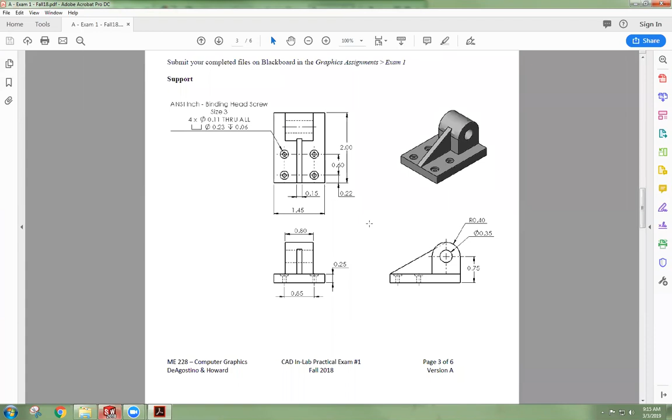Okay, so we've come to the second problem. And here I'm only going to show you how to CAD this piece. I'm presuming that you can CAD this piece on your own. And I've got other videos that show you how to do assemblies. So let's work through this piece real fast.

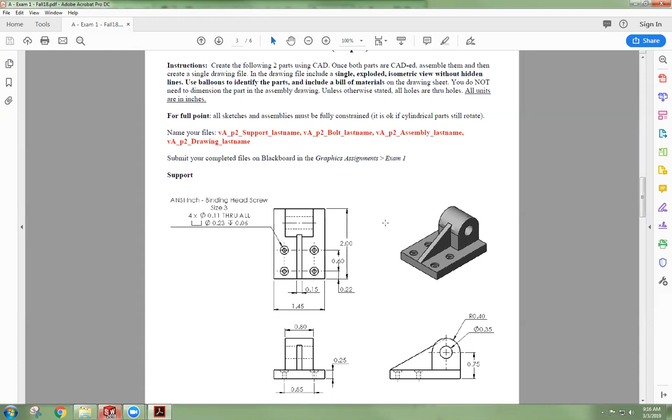When I look through the instructions, I can see that it's telling me what it specifically wants on the drawing file. It wants those balloons, bill of material. You don't need to dimension the parts. All units are in inches. Okay. But I don't have anything weird, no parametric equations they need to do. So I'm kind of free to tackle this part how I see fit.

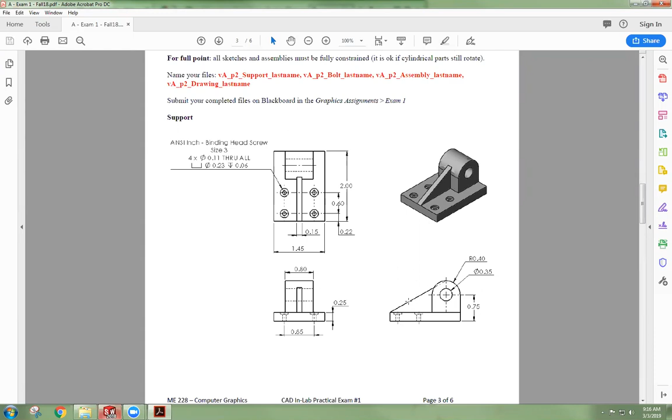And what I'm thinking, you could come at this a couple different ways. I'm thinking that I'll do it from this right view and then create multiple extrusions. I'll show you when we get there. In this piece, the instructions don't say that you have to use the rib tool. So there is a way you could do it without the rib tool. The rib tool's awfully handy. So that's how I'm going to show you how to do it.

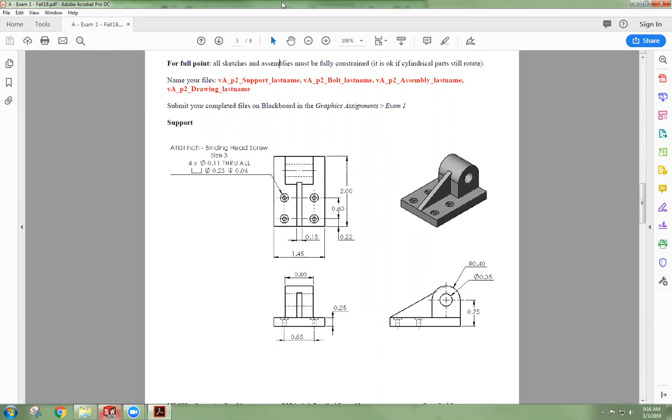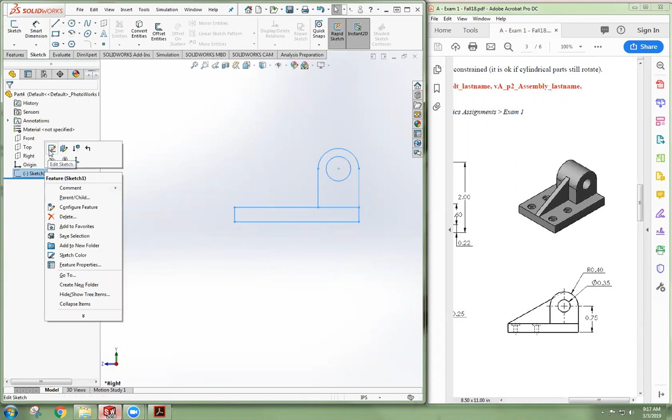Okay, so new part and starting with the right face. Use my rectangle tool. And then going back to my arc. And I just want it to be tangent to both these lines. I can see from my center mark here that this is just a half circle. And then I've got another concentric circle right there. All right, so I've got my basic shape. I'm ready to start dimensioning. I put it in the right units. That's a good start.

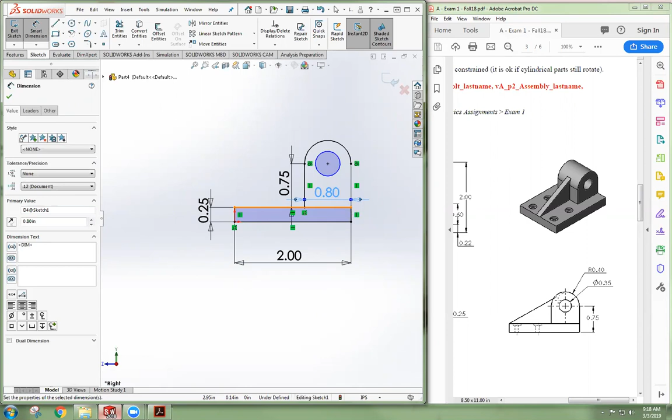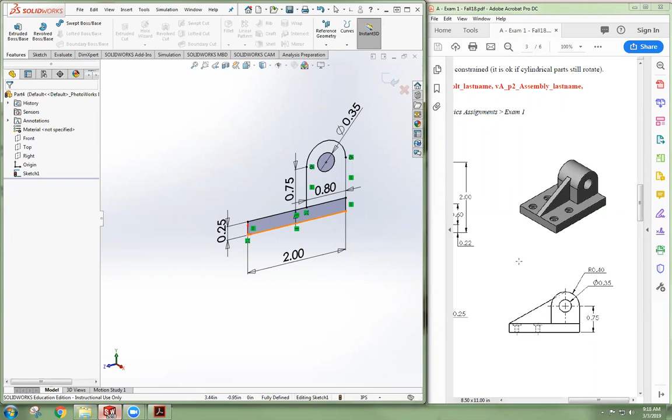Okay. And I know it's 0.8 wide because this radius is 0.4. So double it, it's going to be 0.8 wide. Great, so I've got everything fully defined. So now I'm ready to extrude it. And it's going to take two, since I've got two shapes that are of different widths. Okay. So let's start here. I'm just going to start with the base. And it goes 1.45 units wide. Inches in this case.

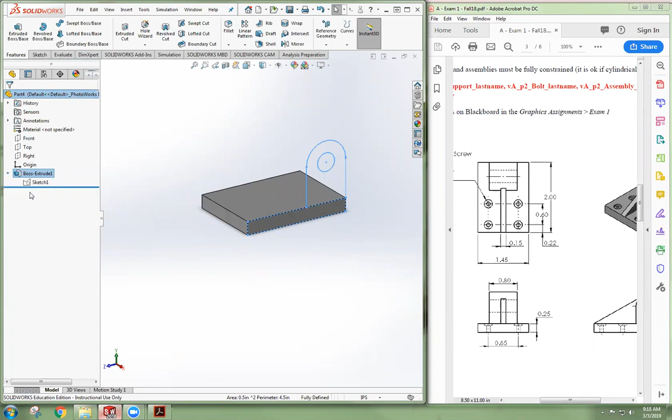Okay, so clicking on the sketch, highlighted blue, extrude boss base. I'm going to select my contours, which is this. Okay, so I could do this two ways. I'm going to use an offset. So I could offset my extrusion so that it's going in the right place. And we can do that. Hold on.

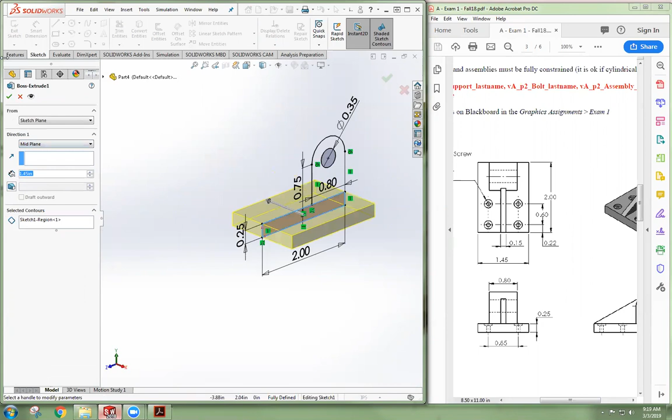Even easier, I probably could have just done this with a mid-plane extrusion. So let's go ahead. Let's do that. So I'm going to delete this. Yes, I'm going to go in and edit this so it's mid-plane. Now I can select my contour here. Mid-plane, 0.8. That's a little bit faster.

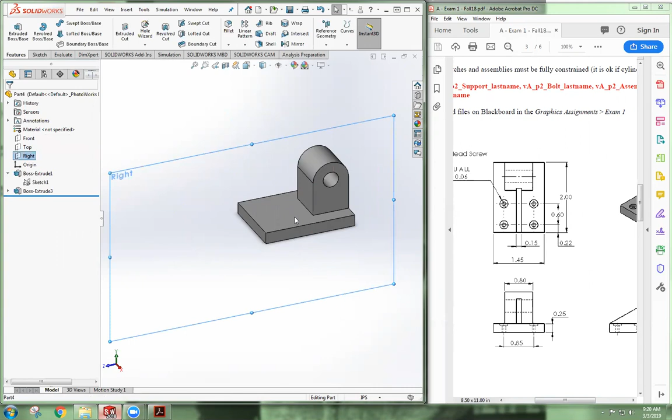Next, let's tackle the rib before we get into the hole wizard. So looking at that right, I'm going to sketch on this right plane. So sketch. I'm going to go normal to it. I'm going to start actually with my center line. So I know I've got this construction line here. You don't have to draw the construction line, but I need something to get that relation. And if I bring the line all the way up, I'm going to create this closed geometry that I don't want.

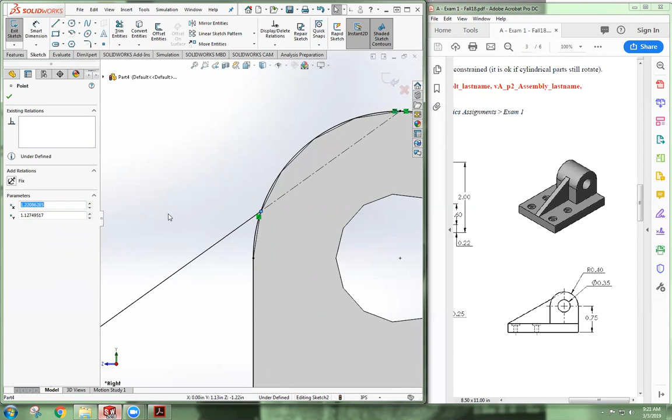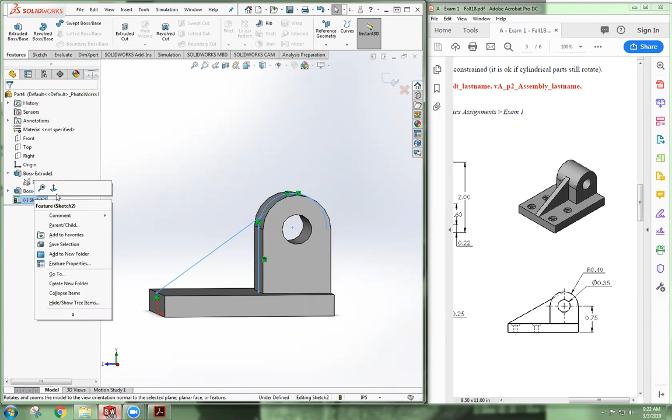Okay, so I was snapped to the right place. I did the convert entities to bring the sketch out so I could make sure that I was snapped to it, but it was. I didn't need to do that. So when I go to my, it says it's underdefined. Okay, let's get back. Oh, it's that point. It's probably because I took away that relation. Hold on. There we go. Fully defined.

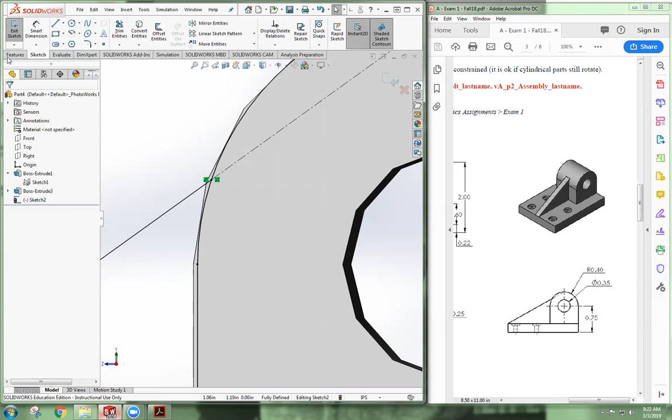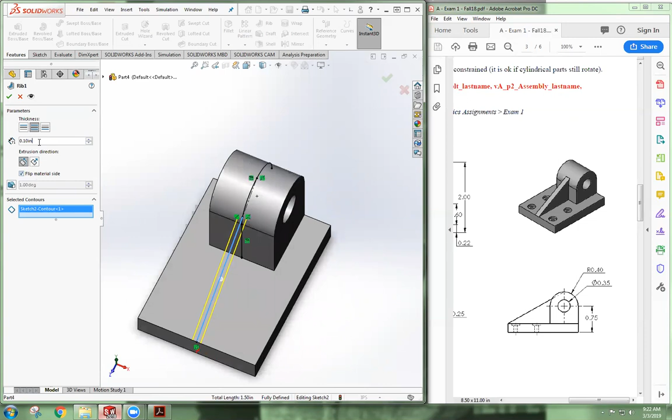Now let's remove this feature. Oop, and I just selected the wrong thing. It selected all of them. Oh, okay. So now I've got the material going the direction I want, but still you can see it's pointing the wrong direction. So flip material side. And that rib width, 0.10. And there we go. Okay.

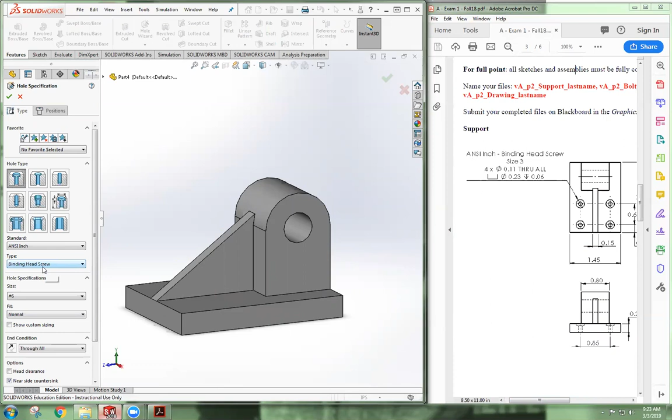So the last piece of this is the hole wizard. So going to my hole wizard, I'm seeing it's a counterbore hole. I'm going to make sure that I've selected counterbore, like this symbol is telling you. And I know I'm ANSI inch, binding head, go to size 3. I'm going to assume a normal fit. Is it through all? Yes, it's a through all hole. I don't know why it started selecting that near side countersink automatically. Uncheck that. You don't want that.

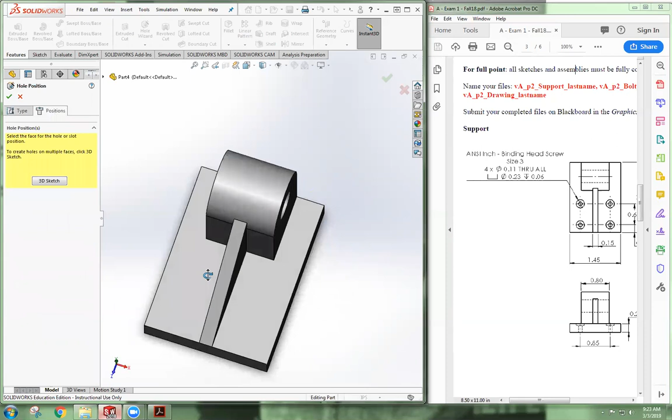All right, I'm ready to go to my position tab. I'm going to select this face and kind of position it in general in the right place. All right, so then I can go in and dimension it to the right location, which happens to be

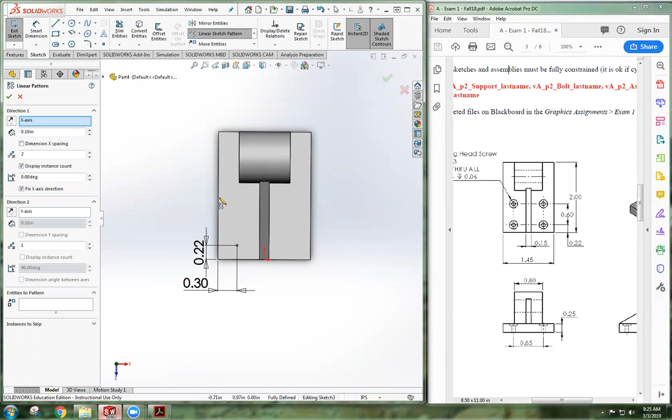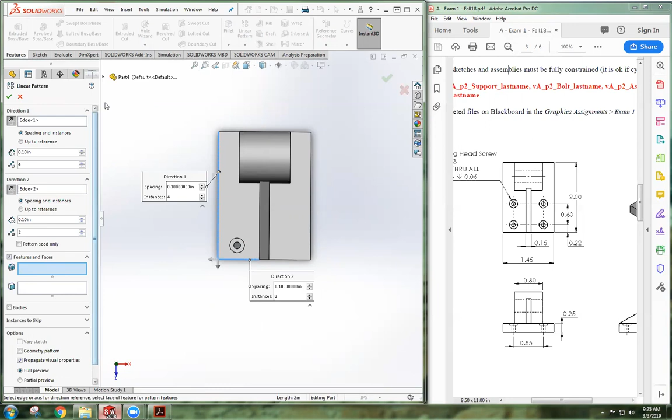Okay. So instead of smart dimensioning all of these, I'm going to do a linear pattern here. And since it's a 3D linear pattern, it's going to ask me to select my axes. Once it's highlighted entities to pattern, I'm going to go over and just select. Okay, so I'm still in the sketch, which is why it's acting funny. Let's try this again. Linear pattern. So direction 1, direction 2. What I want to pattern is that hole. All right, there's 2 instances of each, and this is saying that they're 0.6 apart and 0.85 apart.

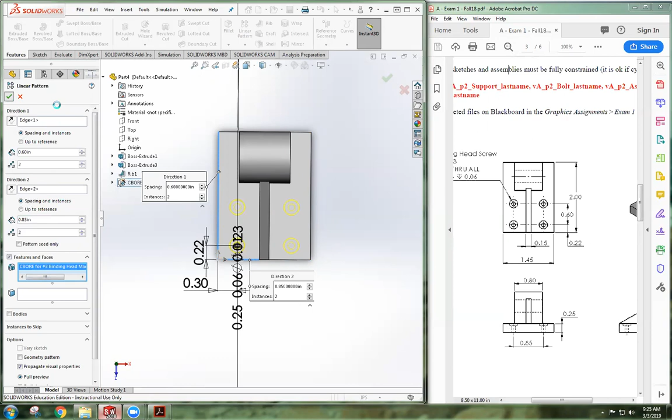All right, so my piece is done. The next thing I would do is create this pin, which is kind of representing a bolt, and then put it together in an assembly.